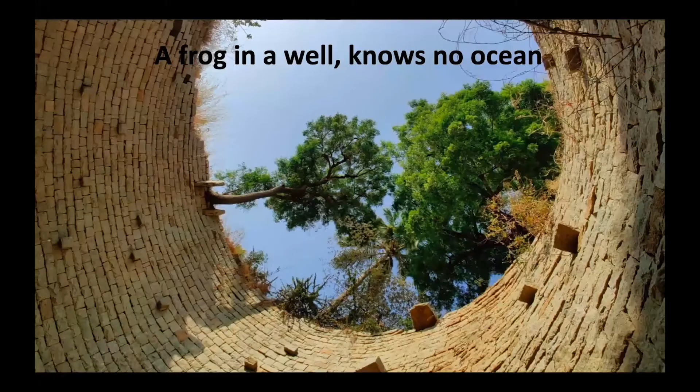Now, we're witnessing a kind of a disservice to the large user base for keeping them locked into this closed environment. So technology has made superior options available, and the actors must break free. With a user base in millions, there is little incentive for the established players to be innovating, whether it is the feature set or friendlier licensing, or most importantly, making the process more collaborative.

Almost half of architecture and design professionals globally are finding it more and more difficult to derive satisfaction from their work and its impact. And I don't think that's an accident. And it's a telling statistic.

But because of the way the systems are set up, the construction and engineering, sales and marketing teams that are downstream from design have no visibility and stake into feeding back into design. It is either too late or futile by the time an insight is generated downstream.

We all know this. A lot of the inefficiencies are created during design, and that is probably the right time for you to address them so that it really doesn't cascade into something much larger 2 months or 2 years later that is completely out of your control.

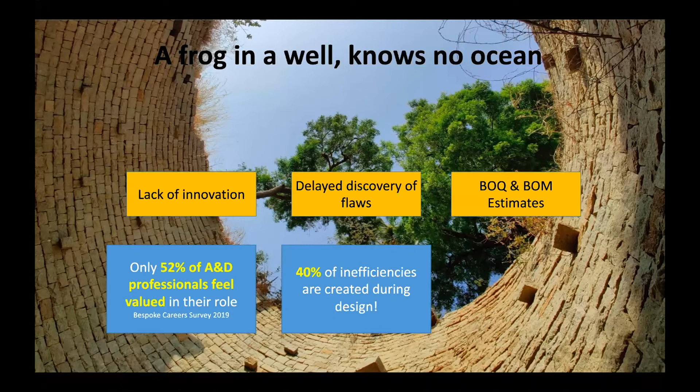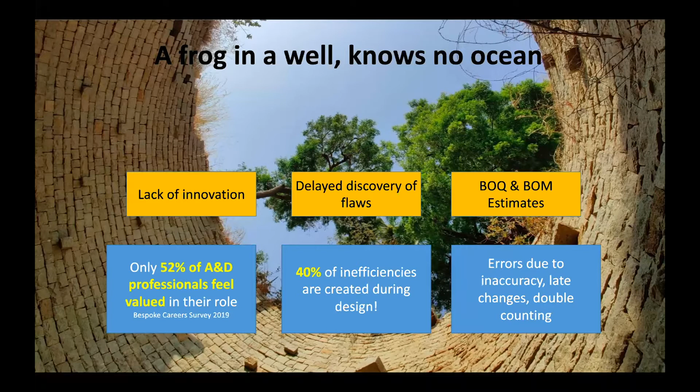Bills of quantity and bills of material estimates tend to be extremely manual. And by the time these are generated, a few weeks, if not months have passed. They're extremely error prone because of the manual nature. Perhaps an Excel engine drives it, if you can call it that. And the kicker is that rework accounts for 40% of the 3 billion tons of raw material that is misspent.

I'm also going to move to sustainability. What is the role of sustainability in design? So sustainability has been treated more as a marketing tool, at least in India so far. Regulatory mandates are trickling in, but they're not sufficient to force a building to be designed with sustainability as a key pillar. The only way that sustainability can be a top-level consideration during design is for significant savings or revenue to be demonstrated because you made the choice. And we're uncovering interventions, which you will see shortly, that do precisely that.

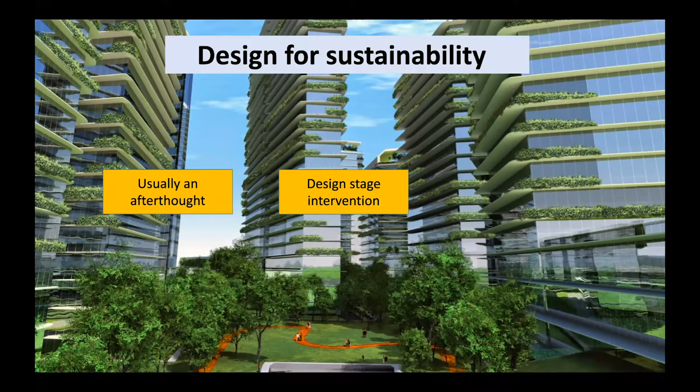How do you choose material and processes that require lesser water, let's say, during construction? Or is there a way to ensure that once occupancy begins, systems are already in place, again by design, that monitor your footprint? You can always retrofit. There's a lot of play for technologies that are possible to retrofit into an existing environment, but that is expensive to do. We do have a luxury of considering them firsthand when we're building or when we're starting projects afresh.

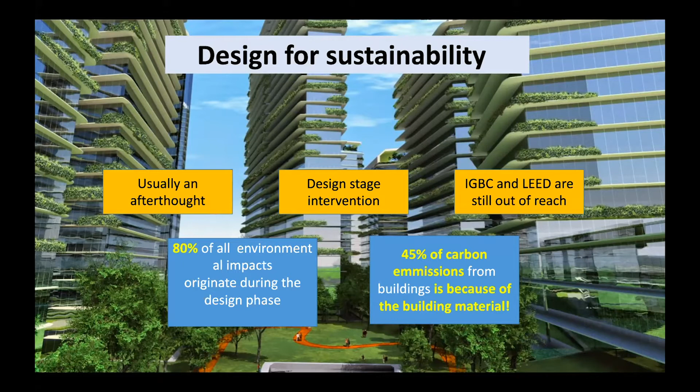Now, standards and orgs like LEED and IGBC do set the tone for the industry, but their message needs to be conveyed and put to action by many of the medium and small entities in the ecosystem. We feel that there's a massive opportunity for technology to play a key role in this adoption. So at REIT, we've maintained a really steady and intense dialogue with the industry ecosystem to understand the biggest problems that this industry faces. And it is a vital exercise for us in our search for the top and appropriate startups that might be addressing some or all of these problems.

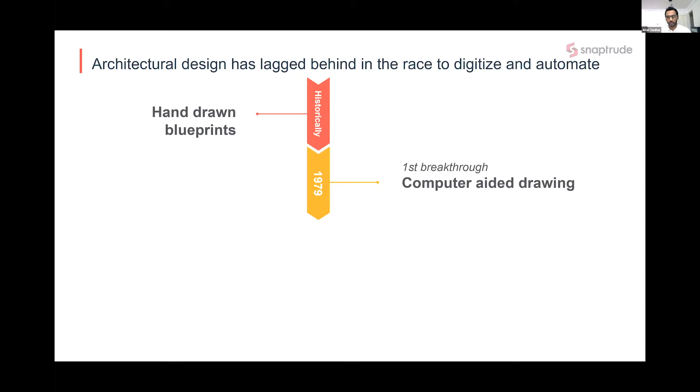For a long time, we can see that architectural designs were done using hand-drawn blueprints. CAD came in as a savior, and even though it took some time, architects did adapt to it, which made the process really efficient. And in the meantime, 3D modeling added a new layer of information or dimension to the kind of execution of design. But they never really talked to each other at the end of the day. 2D and 3D never went hand in hand, and BIM, which came in the early 2000s, was supposed to address this really important issue. But fast forward 2 decades from BIM, things have still been messier. There's still a huge lack of innovation that has happened in the industry.

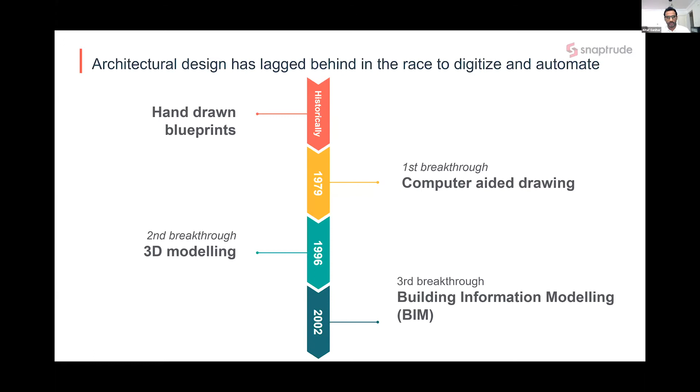And coming to how BIM was theorized to be the poster child of solving all of these problems, and how it has turned out, I'll just reflect upon that very quickly into my presentation. Fundamentally, if you look at the design process, it's a very lengthy process and very much iterative. Architects just don't do a design at one go. They go through multiple iterations, maybe a few hundreds, even a few thousands, over an elaborate period of weeks, months, to even years, depending on the scale of the project.

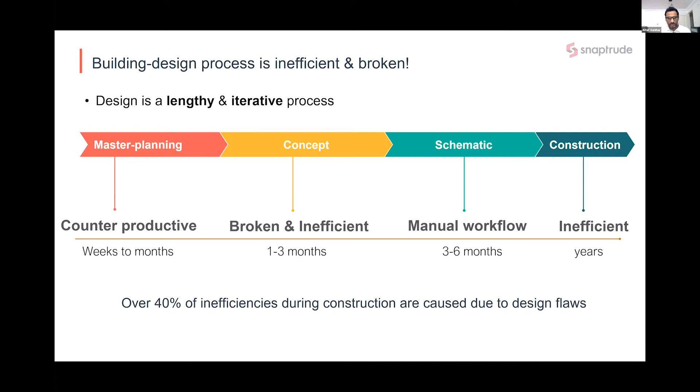And the impact of design is so important. Any error that happens over here, any inefficiency that creeps into the design gets reflected at a very later stage during construction. And as Gautam pointed out, and yesterday, Amir Paul also explained in detail how design leads to so many inefficiencies during operations as well as construction. And the impact of these errors is massive. And the reason why it happens is because the tools which are used in the industry were never actually meant for architects. They were adapted by architects because they had no choice.

AutoCAD, for that matter, is being used to do the documentation and the drawing, and the 3D happens in a tool like SketchUp, which just is inaccurate and incomplete in nature because these tools do not talk to each other, and the data part still exists on Excel, which has to be manually extracted out of these drawings.

And if you're looking at a flywheel, which is the iteration of an architectural design workflow, every time the flywheel spins, an inefficiency gets added, and the probability of an error creeping in is very high, since these tools do not talk to each other by themselves and data has to be manually transferred. And since the design process is a very elaborate process and involves multiple tools which do not talk to each other, the problem just amplifies.

But I guess everybody here would be contemplating why we are not using BIM, because BIM was invented to solve this very problem. But coming towards BIM, I would say that BIM is a process, not a software, and that's how it was theorized. And it was supposed to solve all of these problems. But today, the problem is not with BIM as a process, it's the tools that are a big letdown.

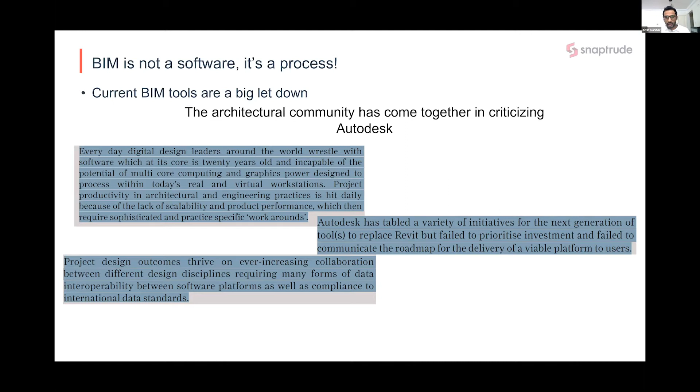And Autodesk is one company that is pointed out, but they have actually not spent enough time or resources in innovating and figuring out how to solve these problems which have been existing, and there's also no clarity on how the future unfolds. And interoperability has been a major cause of concern and still does exist. Again, the entire industry has come together in criticizing this aspect and how they can open up. And a very good thing happened just yesterday: Autodesk joined the Open Design Alliance, and we will just see how this turns out over time.

And on top of this, the licensing models or subscription models have changed dramatically in the last 4 or 5 years, and architects really don't have any strong clarity on how they're going to go ahead with it, and there's a significant increase in cost to their business with literally minimal or no value add in terms of the tool set.

So the reason why we feel that this is happening is because even the BIM tools were actually inspired a lot by mechanical engineering and not looked at from an architectural workflow perspective from first principles. And that's where we decided to build a tool which helps architects focus on the art of architecture, and the tool can help them do the rest of the things in as convenient a way as possible.

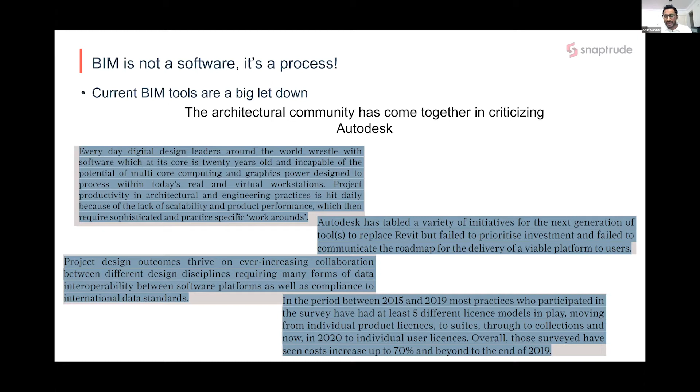So let me, rather than speak about it, go ahead and show you a very quick demo of how Snaptrude works. We are a web-based tool, browser-first technology, and it works seamlessly across an iPad as well as any of your computers. All you need is a web browser like Chrome.

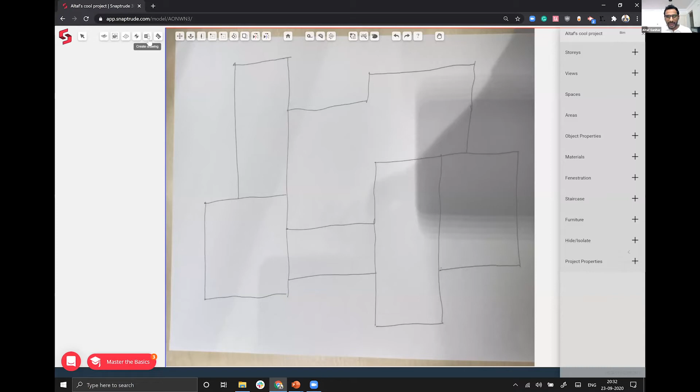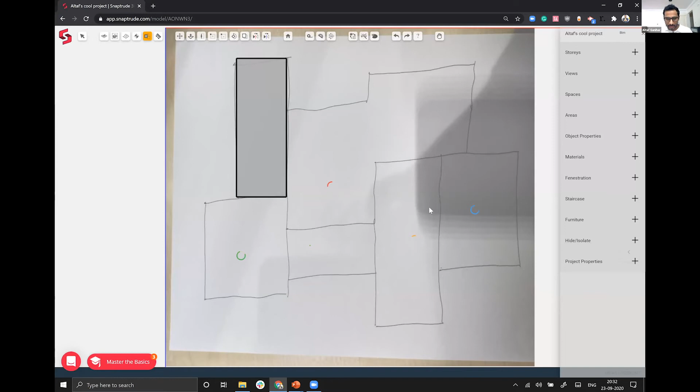For time constraints, I've uploaded a hand sketch taken with my phone camera, a pretty rough sketch. All I would do is a few clicks, and you would see that the drawing gets created out of this sketch. So Snaptrude not just digitizes the sketch, since sketching is still the primary way in which architects actually conceptualize, it optimizes it to create the most plausible drawing.

So if you see, everything snapped to itself, it's a watertight drawing. Everything snapped to the nearest 100 mm. So you don't have to worry about dimensions and all other things.

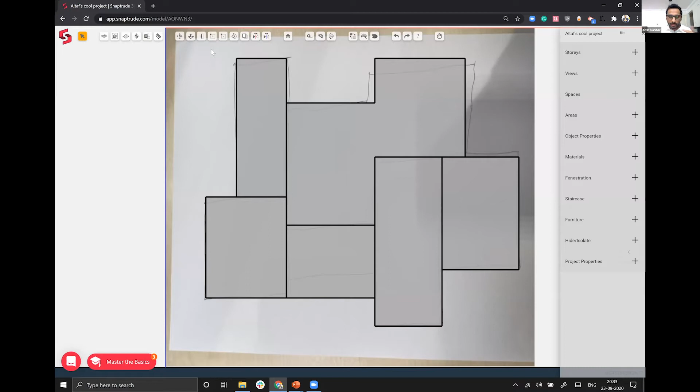And like any other BIM tool, Snaptrude is automatically 3D while you generate a drawing out of it. Let me go ahead and start labeling things. Say this is my bedroom, my dining room, living room, balcony. So the moment I said it's a balcony, it automatically changes its dimensions or height to the nearest 1 meter value.

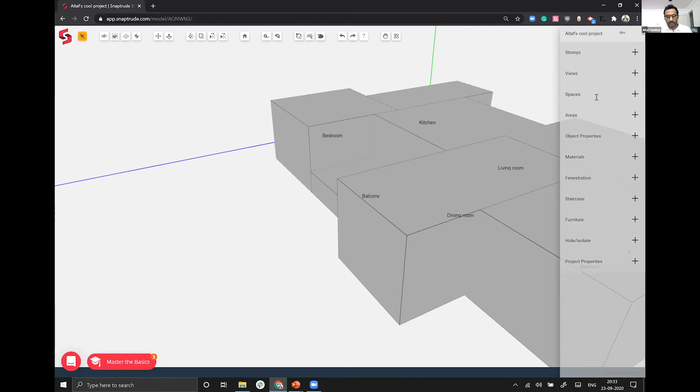So Snaptrude is parametric by itself, so they can play around and iterate over designs in a very quick way. So the height is 3 meters, I can just change it to 5 meters, 4 meters, or bring it back to 3. So from here, Snaptrude, since it's a BIM tool, supports all 2D and 3D edits like any other design tool would.

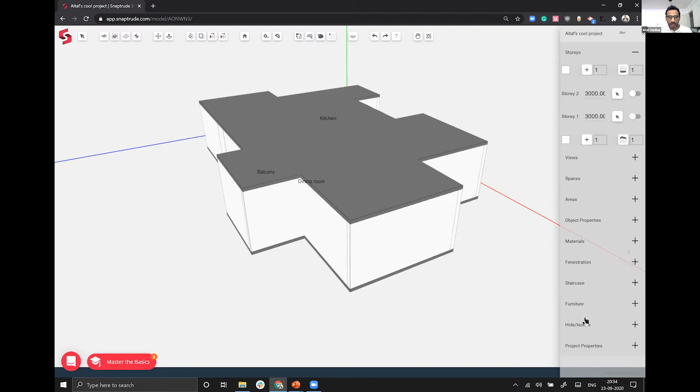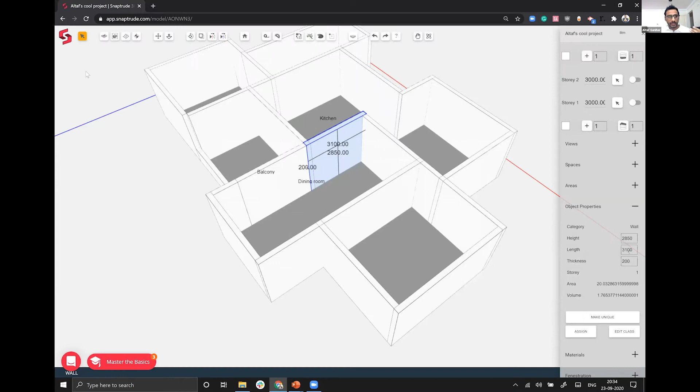But now in terms of the automation, with one click, Snaptrude generates a BIM model out of this massing study which was there. So let me just hide the roofs, for example. So as you can see, it's a full-fledged parametric BIM model which is created, and everything is a BIM component. I can even go and study how the composition of this wall is. So it is made up of brick with plaster and paint on both the sides, and all of that information layer is added automatically to the drawing.

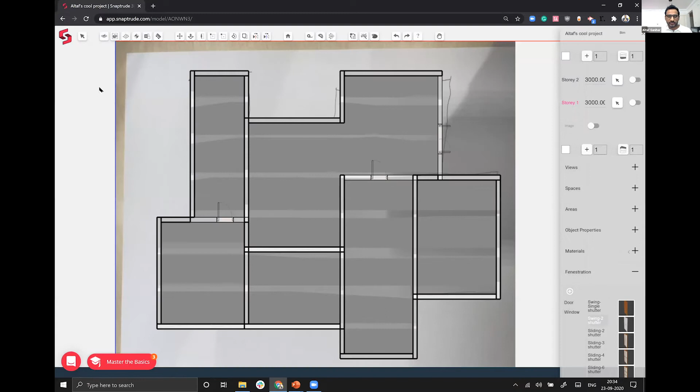Let me go to 2D, just add a few doors and windows, which is also pretty standard. Let me just add for variety a different kind of door over here. Yeah. So this is where you can actually complete your entire 2D drawing as well as 3D model.

Coming to automation, Snaptrude with one click automatically interior designs that entire space. This is not just helpful for you to generate a presentation drawing, but also do spatial analysis. Is your bedroom even big enough to have a king size bed or not? Is there enough walking space if you're designing a commercial property? All of these insights can be provided right during the design stages for architects to iterate very quickly.

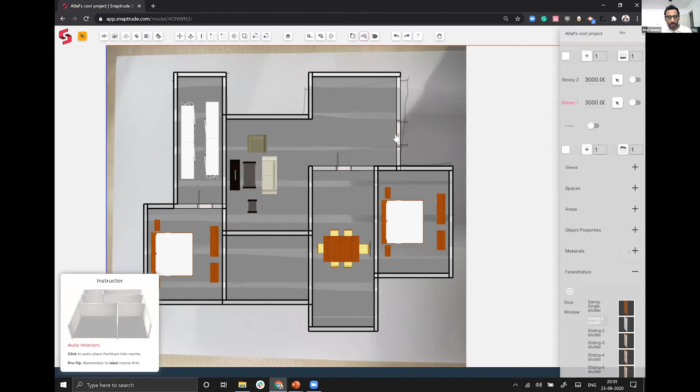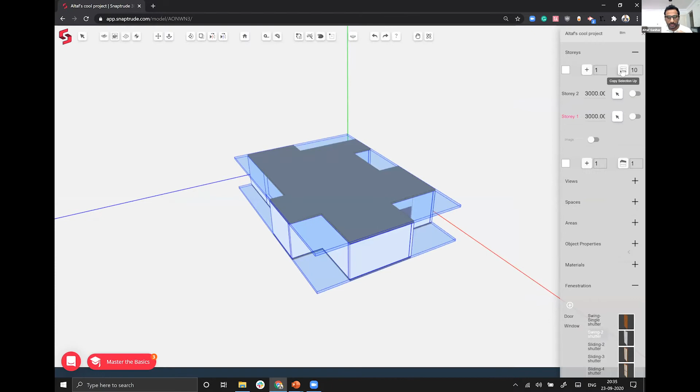And Snaptrude also generates a very well drafted drawing with one click. You don't have to spend days in just marking dimensions, which in the 21st century and in 2020 sounds very lame, but still happens. Going back into the 3D, say if I want to create a 10-story building out of it, all I'm going to do is press 10, and a 10-story building is literally created out of this. And if you remember, we just started right out of a little hand sketch, which is drawn on a napkin.

So while the 3D model is being developed, the BIM information is added, Snaptrude automatically creates valuable, insightful data at one click. So on this areas tab, the entire built-up area and the carpet area of the entire design is developed, and it shows you how the built-up area and the carpet area is split across the entire model as well. And it's all exportable to an Excel sheet, and you can even keep a tab of how your FAR is changing as well.

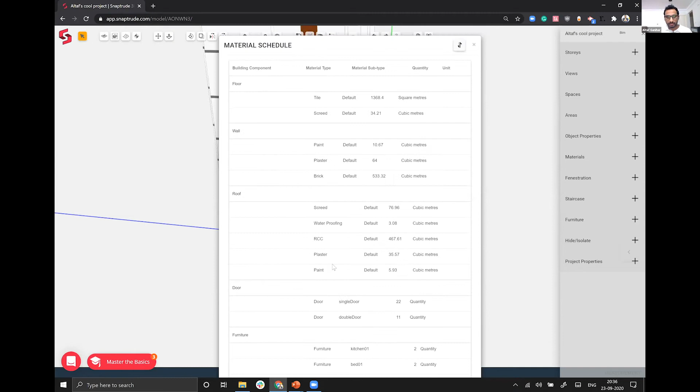And simultaneously, Snaptrude does generate a bill of quantities with one click, giving you the detail of how much RCC would go in, how much bricks, the scheduling of doors, windows, and furniture happens automatically while the design is moving. So real insightful data is made available right when you are designing.

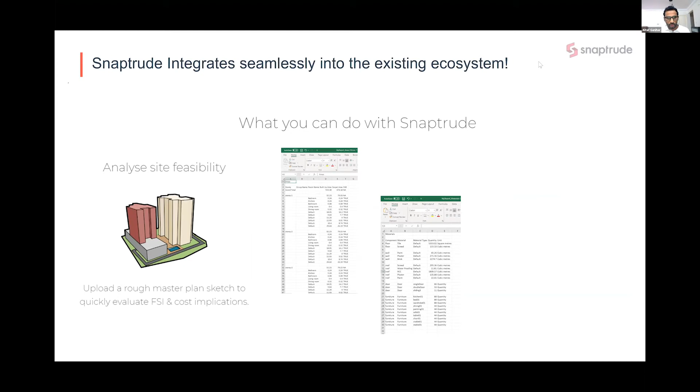So coming back, Snaptrude, as I showed you, has gone from literally a hand sketch to a detailed 3D model, but it also fits extremely well into the existing design ecosystem. So it can be used directly from the time when a builder or an architect is doing feasibility analysis of a site, with data being available right at the onset of the design, to even generating massing studies and presentation drawings for your clients.

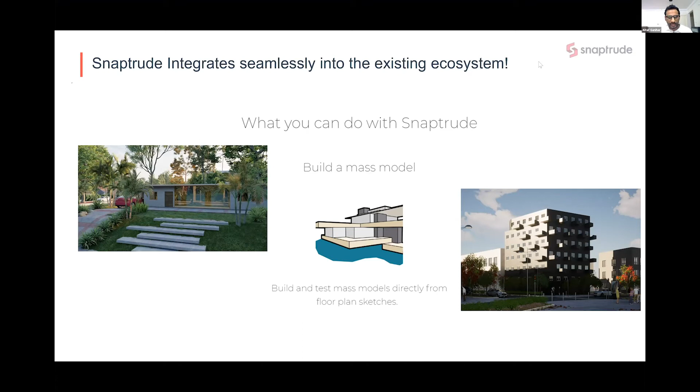And Snaptrude talks to all the rendering tools out there in the market, so you can actually render out detailed and beautiful models like this. And Snaptrude can also be useful if you want to detail out your design and generate detailed documentation, and even exports to BIM tools like Revit if you would want to do construction documentation and service integration.

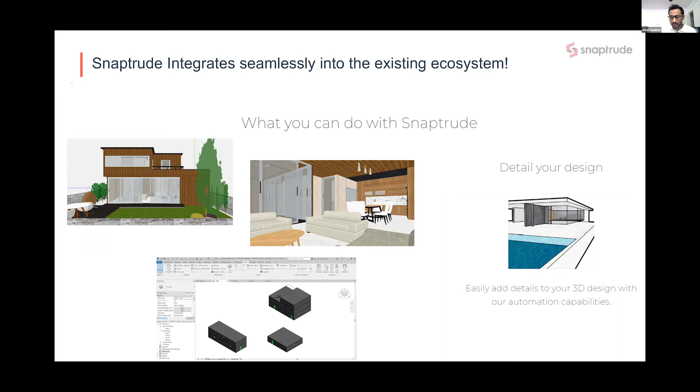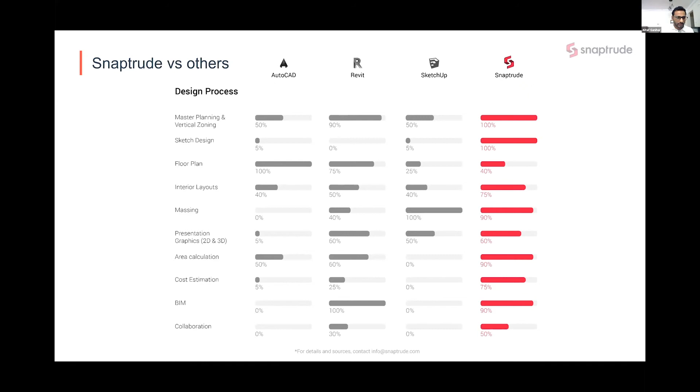And not just the speed at which Snaptrude executes and automates things, even in terms of the capabilities, Snaptrude stands in a much better way compared to existing tools that dominate the industry. I've just taken 3 names over here, but the reflection would still be similar.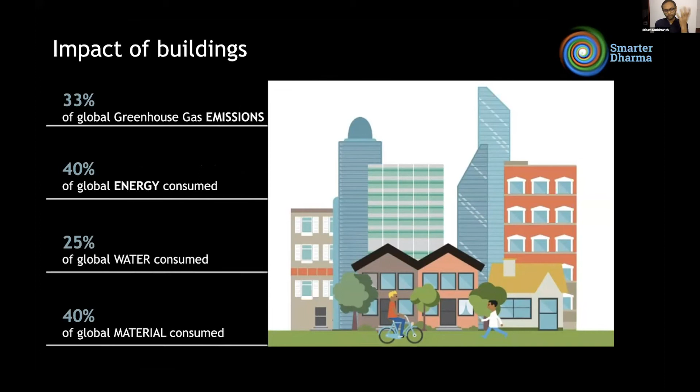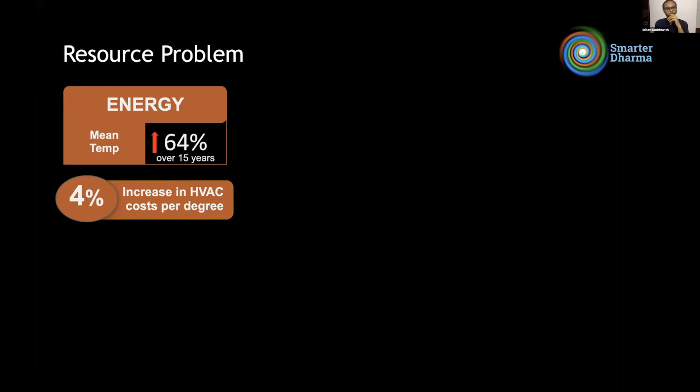Let me get to understanding that as a resource problem for a typical metro. Now in India, but in reality, we believe that this is very depictive of cities in the world, metros in the world, right? Energy, rising temperatures there, sheer lack of access to groundwater, and then doubling waste over 10 years. This is having a huge financial impact and stifling builders as well as tenants to be able to live sustainably. However, we believe that if there's an intervention at a design level with technology-driven adoption of sustainability, there's a huge untapped potential economically and environmentally to tap, and we're not realizing it.

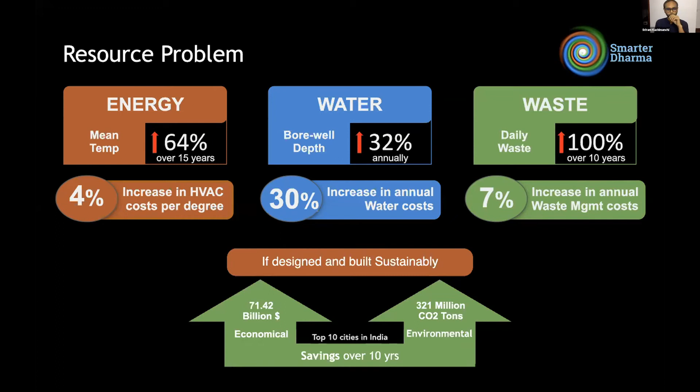Close to $72 billion, and it's a very conservative number, right? In just a few cities, we believe that savings is possible. Now, why are we not doing this? What's stopping us is that we do not have one central decision-making platform which is comprehensive, right? Which really enables the stakeholder to quickly make a decision.

So that's where we come in. And that's what we're excited to introduce, right? Our SRP, our Sustainable Resource Platform, SD+. So quickly, how does it work?

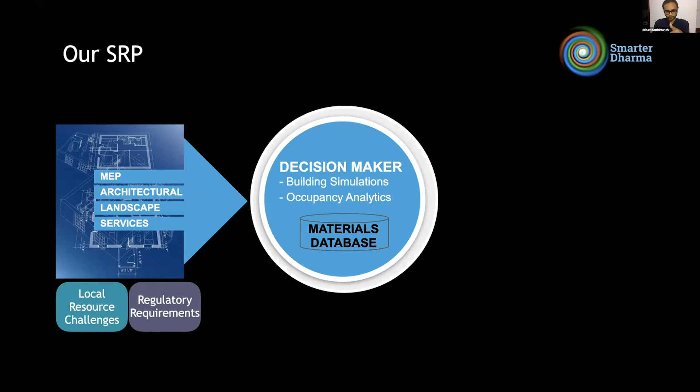We take your design artifacts, your CAD files, your Revit files, etc., marry that with your resource challenge at the local level, regulatory compliance requirements, and throw it to a decision-making engine and let it do its magic, right? Backed with a strong material database, it comes back and gives you an integrated set of solutions and partners with whom you can work.

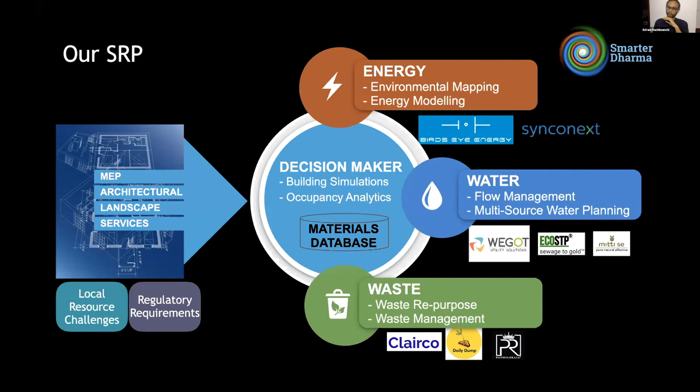So let me show how it works. Let me take a case study. Now, this is a 950,000 square feet residential community, and the platform threw very aggressive goals at us. The recommendation was we could achieve 90% self-sufficiency in water. You could achieve 100% self-sufficiency when it comes to energy in common areas, right? The intervention combination came up and gave this kind of value.

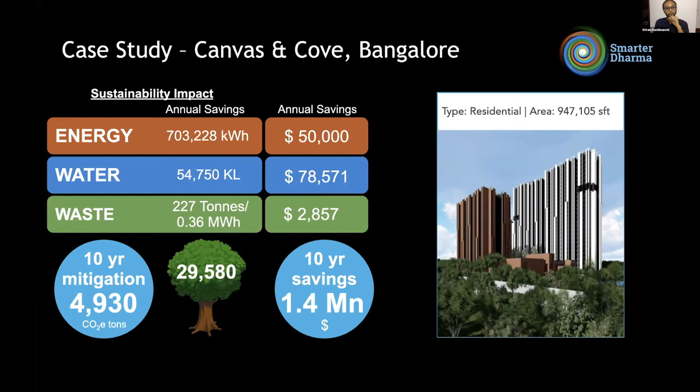The best part is the tenants are going to see 30% savings on a monthly basis on their operational expenses, and close to 30,000 trees would be saved over the next 10 years, and that's the kind of carbon mitigation possible. So let me show you this project on the platform. Let me go to the platform right away.

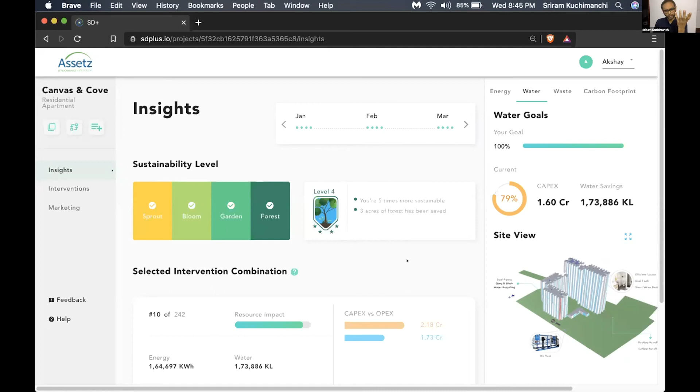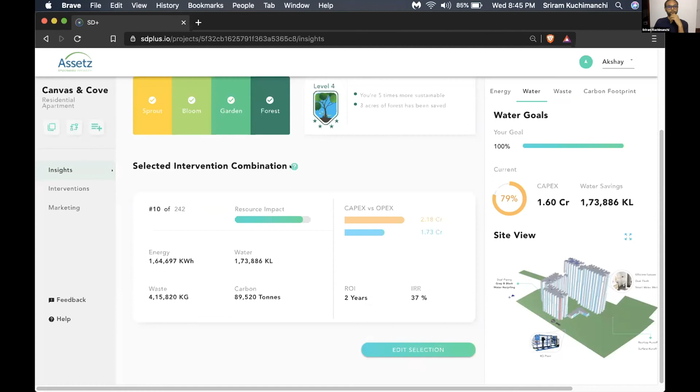Now, how does it happen? So it's based on a blend of interventions all put together. The platform threw out 242 solutions, of which number 10 was chosen, which has a fantastic ROI of 2 years. But you want to play with it. Here's the chart. Now we're excited to show our smart chart where you can play with it.

You can set your own goals, and accordingly, the various interventions which will make sense to make this happen will be configured by the platform. And you could then pick whichever one makes sense to you. As you can see here, you can pick whichever one, it will give you the impact. Now, you want to see what these interventions are, right? Let's go to the details of the interventions, which is here.

Again, I told you decision making is key. Right off the bat, again, we're constantly showing the financial impact and the resource impact. So in English, we're saying not just the units saved, but also how many houses you can power per year, taking a national average. Now, this is a project focused on water, so I'll jump right into water.

My personal favorite feature we have built is we are able to auto-generate your entire water flow diagram. Now, this is not a simple thing. It comes actually with all the solutions, the sizing of each of the solutions, and not too far off, we're going to actually showcase and pinpoint where each of the solutions has to be deployed.

Now, remember, we had a 90% self-sufficiency requirement. So a couple of unique solutions thrown in were: the sewage water should be segregated, grey water should be naturally treated and RO'd so that it becomes potable, and black water is used separately. And we use a different kind of RO technology so that we reduce the wastage.

Now, that plays into these various solutions. Now, here in water, we have demand optimization, source creation, and treatment approach. So I'll pick rooftop rainwater harvesting simply because, rainwater, everybody should harvest, in any city in the world.

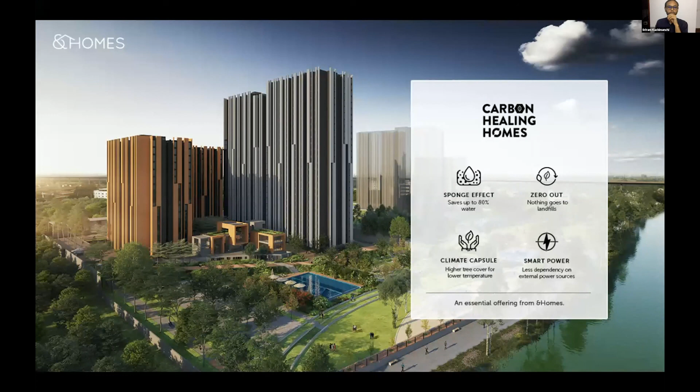79% savings. With this kind of content we have created — let me go back to the thing. All right, with this kind of content we worked with the marketing team, and our service was able to create the idea of carbon healing homes. And the sales team could see great success with this, and we are happy to create a new concept.

Now, another project quickly to talk about. This is a close to 640,000 square feet commercial place in downtown Bangalore. What excites me is, before a brick was laid, our solutions came out to save them nearly $500,000 and enough carbon mitigation potential that over 10 years we could save 76,000 trees.

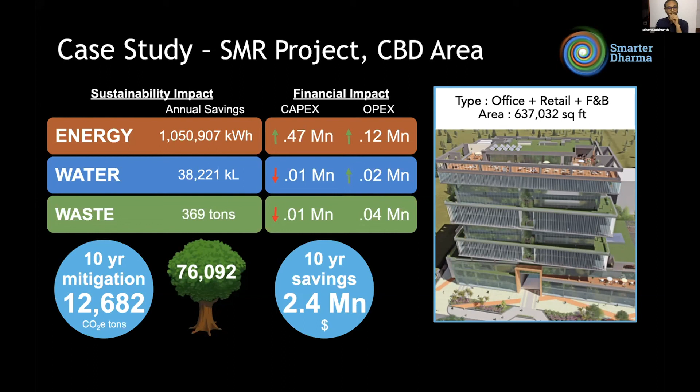But that's not it, right? We have very bold goals for 2030 to mitigate 150 million tons, and we need all of you to work with us so that we can really make a strong dent at meeting the global Paris Climate Accord commitments, which all of us have set.

And the big picture is, we believe that today we're starting with residential, commercial. We can eventually do hospitality and really re-look at how sustainability adoption can be made easy, not just at businesses and organizations, but also for individuals.